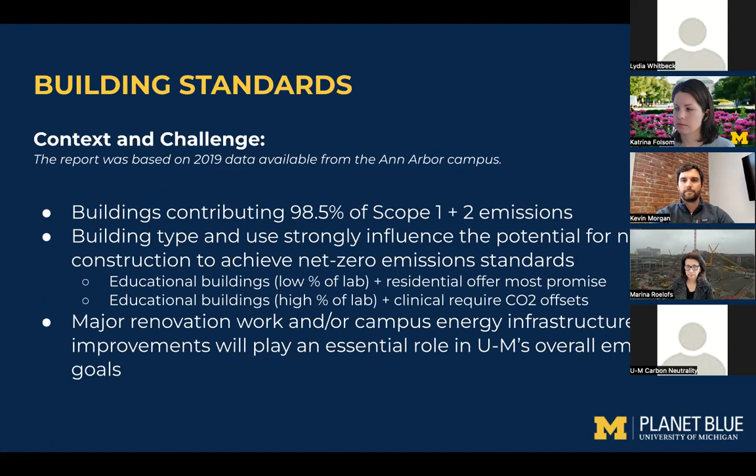This context was also within existing performance standards. U of M was already performing better than state standards require, with a 30% stretch beyond the ASHRAE 90.1 2013, which is the current standard adopted. And we also know that ASHRAE standards are moving towards net zero, but with a goal of getting there around 2030, also dependent on whether states adopt those goals. U of M has a desire to move there more quickly, so the building standards was looking for efforts to get there faster than code otherwise would. Next slide.

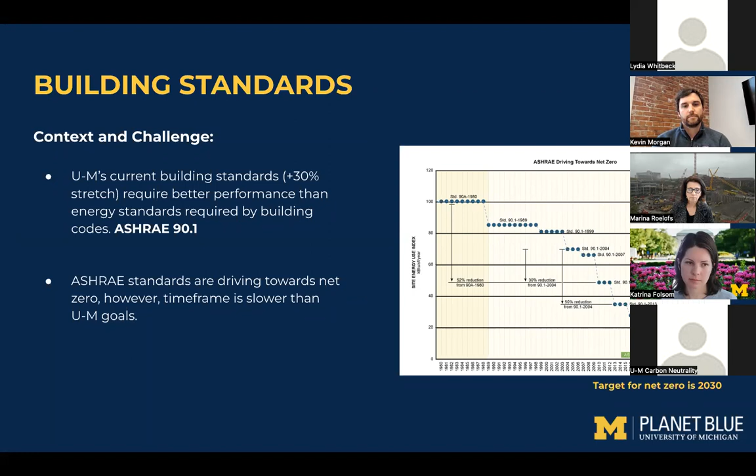At first, I was very happy to be involved in the project to try to find solutions to reduce the CO2 emission for the UM campus. I was involved in projects before with university buildings that have been net zero or even below, and I'm also currently working on projects here in Michigan to design a net zero building for my own purpose.

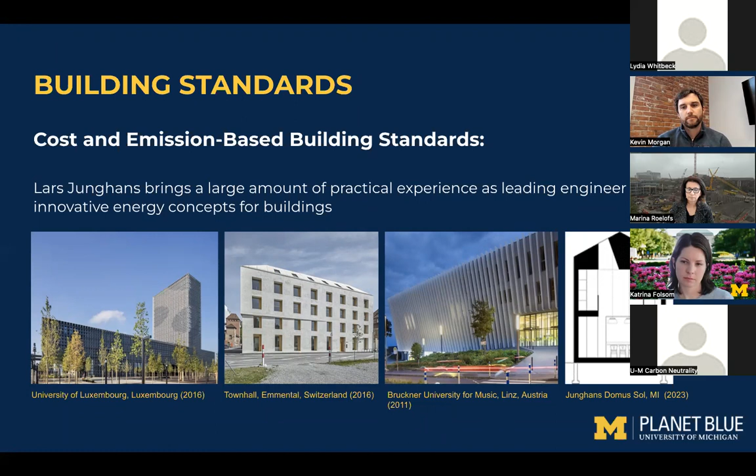What I want to present here is a little bit of the technical background which we worked on. Since I worked on these kinds of projects before I came to University of Michigan, what I've learned is that we have to look not just at the building itself, but at all of the energy flows which provide the energy for our building operation.

So to look at the CO2 emission, we have to look not just at the building itself, but how the energy is produced or generated - this means how the electricity is generated. This is very important to make an evaluation of the CO2 emission of buildings for its building operation.

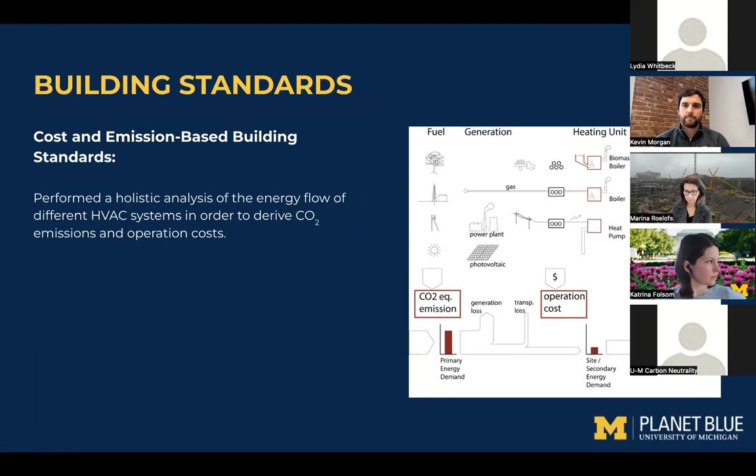So we had the approach to develop a standard which is not just based on the energy demand, but which is also based on the CO2 emission and probably also the cost - how much does it cost to have a building which produces less CO2 emission? We are not the first one doing this, but there is an international standard called the 18599 standard, which was developed in Germany and is now in the European Union a kind of general standard for buildings, which is not just based on CO2, but also integrates the cost of the building.

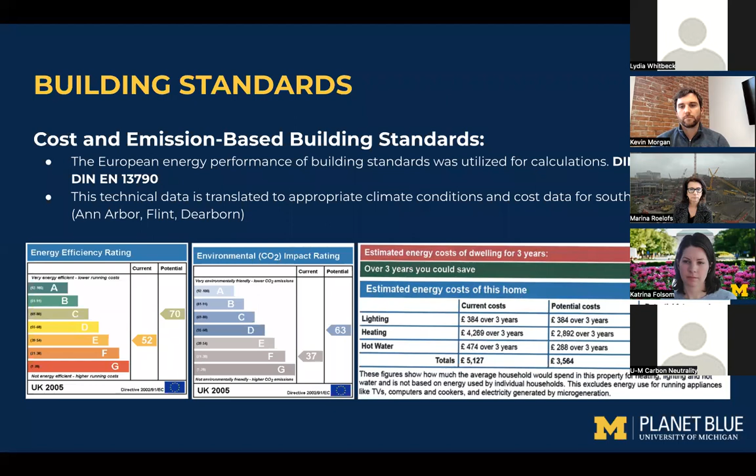Here you can see an example building from the United Kingdom using this kind of standard. You know these kinds of evaluations, like when you're going to buy a fridge - A means it has a relatively low CO2 emission, and so on. According to this, we also developed a kind of CO2 emission standard for buildings for the UM campus.

All the technical calculation is based on a small set of international building standards focused on calculating CO2 emission and operation cost. This is very intensive work, specialized for all types of buildings - residential buildings, office buildings, university buildings, hospitals, everything. It also includes not just heating and cooling, but also the energy needed for duct design, lighting, and water heating. So it's a very comprehensive international building code which we have used.

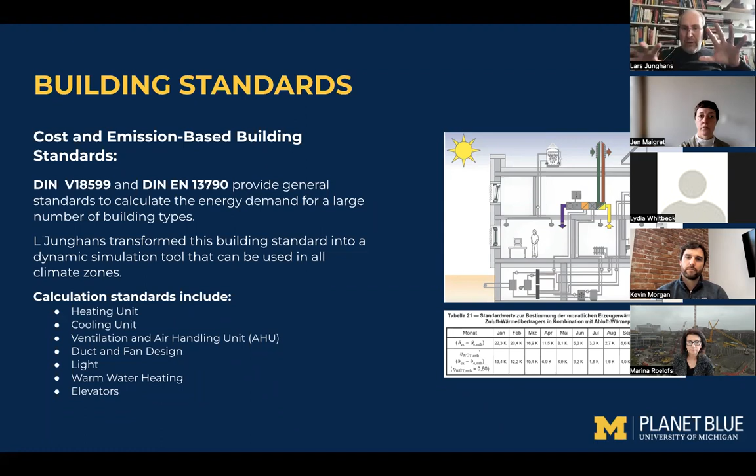While the building code was focused on European climates, what we did in our work was transform this standard to our local conditions - with more dehumidification, for example - to fit our local conditions here in Ann Arbor.

We did a lot of building simulations. We used this building code along with dynamic simulation tools, and then we tried to find the optimal situation - not just to reduce the CO2 emission, but also to find a cost-effective solution.

In this diagram, this example, you can see there are different points for CO2 emission reduction and for operation cost reduction. The optimal point is the one closest to the zero point. So we combined different options with each other, trying things like better lighting and more insulation, to find the best solution at the best optimal cost.

So we did a lot of building simulations to find an optimal spot, and then we made recommendations for different building types.

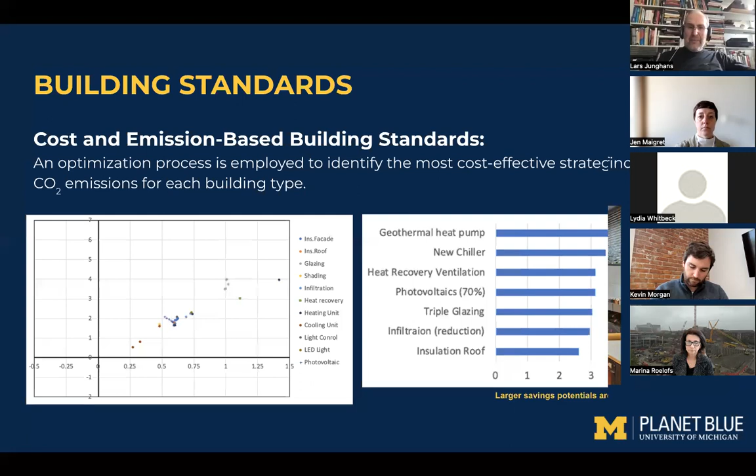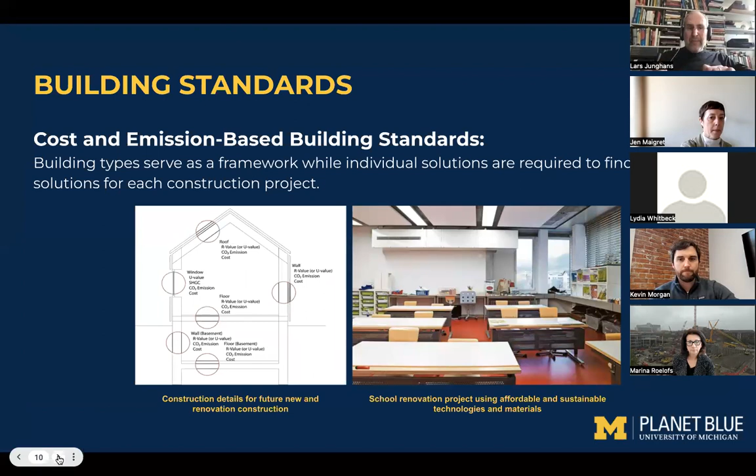We made some recommendations for different building types. This is also part of my research work, looking to find optimal solutions for building renovation in the residential area - again looking not just at CO2 emission but also at cost, always trying to find an optimal solution for both aspects, cost and CO2 emission.

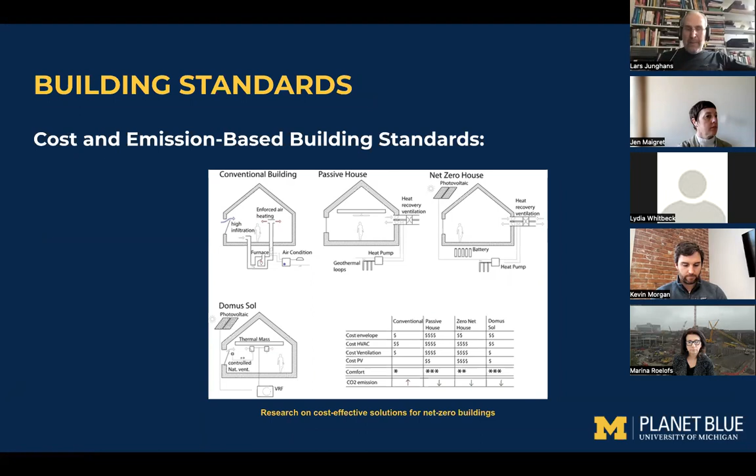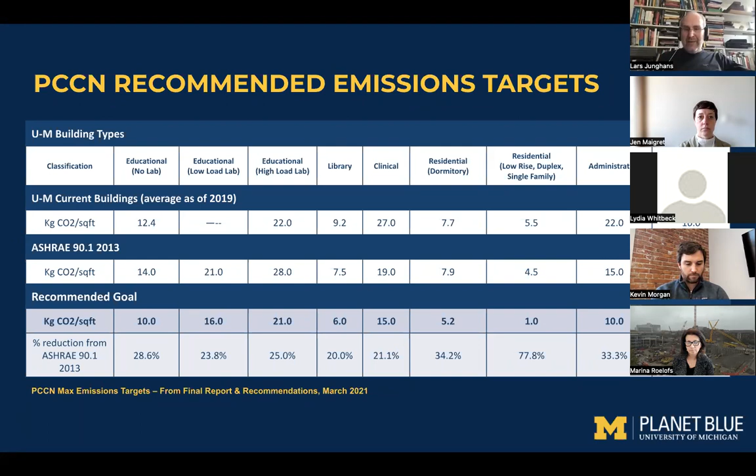Finally, we made a recommendation for a specific CO2 emission per square foot of building area, finding the value we considered most appropriate - not the smallest CO2 emission achievable, but the most cost-effective one. We made a classification for different building types to find optimal solutions, and then created a guideline for how to achieve this relatively low CO2 emission per square foot of building area.

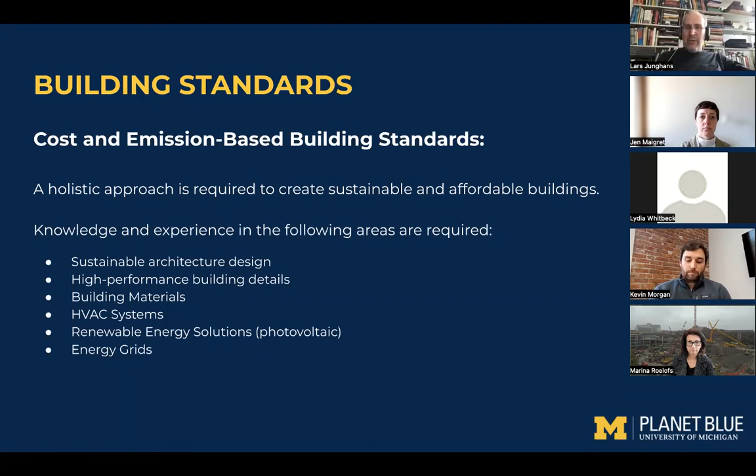And these are a little bit of recommendations which we are going to give. It's very important that we see the approach as a general holistic approach, not just to think about the building envelope or the HVAC systems. So we need to see all these different aspects: building physics, building materials, HVAC systems, and even go to the energy producer and renewable energy sources on the building site. So it's best to find a holistic solution for these problems which we are going to target. Thank you very much.

Thank you, Lars. That was a great introduction.

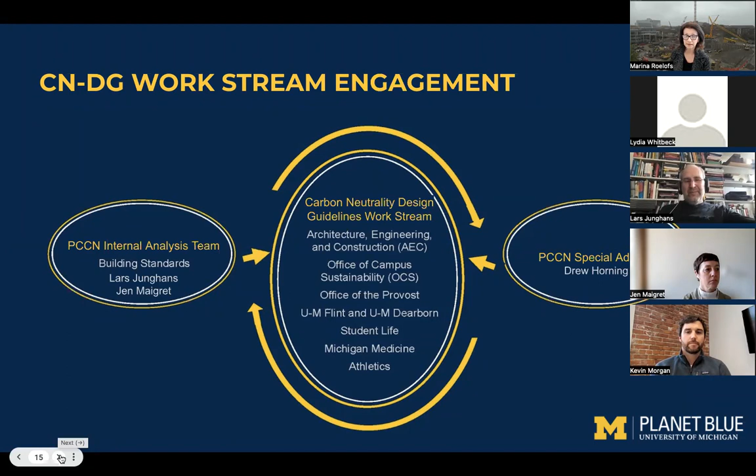So after the president announced the plans to begin implementing many of the recommendations, work streams and teams were created for the different PCCN recommendations, and ours was charged with incorporating the maximum greenhouse gas emission targets for the buildings. Our workstream membership consists of technical folks from our department, AEC, the Office of Campus Sustainability, the Provost Office, Student Life, Michigan Medicine, Athletics, and U of M Flint and Dearborn, in addition to input from the PCCN special advisors and the PCCN analysis teams as shown on this slide.

So as Jen and Lars covered, the PCCN building team created these maximum emission targets for these building types. The targets are represented in two ways: a total number, and also a reduction to the ASHRAE baseline, as indicated in the chart here.

As the workstream started looking at these, we determined that to incorporate them into our building standards, it would be beneficial for us to add more definitions to assist our project teams in determining which building categories an individual project would fit into, because most of our buildings have several space types within the same building.

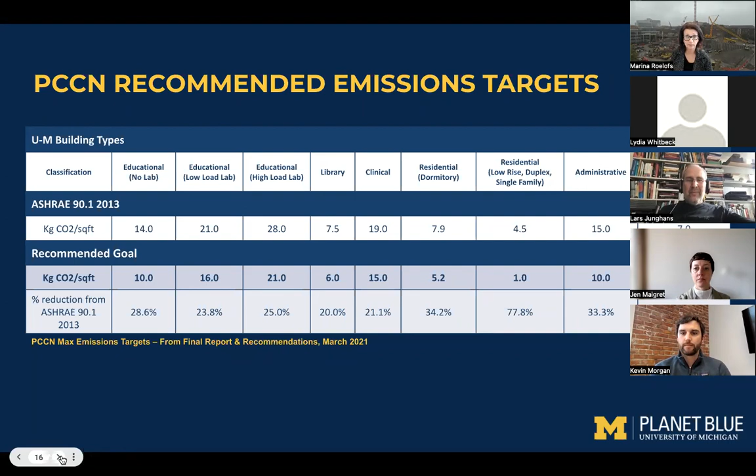Just as an example, if we look at the Biological Science Building completed a couple of years ago, it has a few different building types in one building.

Therefore, our efforts to date have been to look at the building types and add space types and infrastructure needed for the activities within the buildings. And as we worked on these added definitions, we also looked at whether there were building types that needed expansion or refinement. We have done this in collaboration with faculty experts, university units, and our technical staff, and we are now working on a new design standard to add these maximum emission targets into all of our designs.

This slide represents an example of the additional definitions to the building types that I've been working on.

This is for the educational, no lab, low load lab, and high load lab buildings, which were at the beginning of the chart that Lars and I just showed in the previous charts. What's in red is what we are adding, in summary fashion. To assist in understanding the buildings, we added three categories for each building type: the definition, the space type, and the infrastructure. In the infrastructure example, you can see that within these educational buildings, the major difference is in the HVAC, ventilation and exhaust, and the plug and process load that drive the greenhouse gas. This information will assist our teams in creating the most stringent greenhouse gas target, versus trying to fit a building into one category just based on the largest space use.

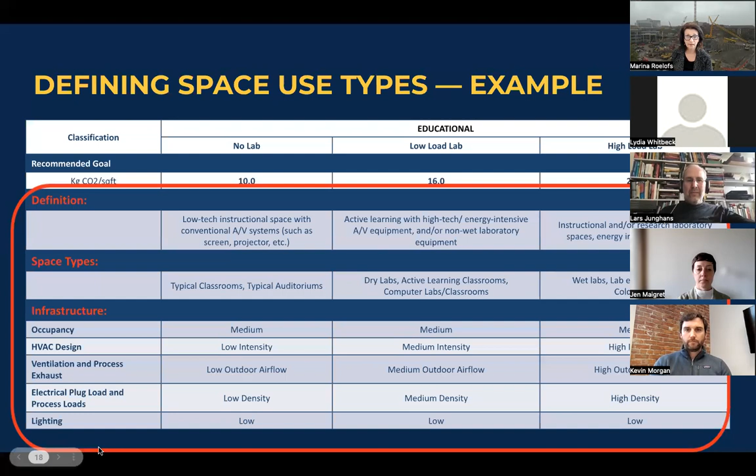Then we also looked at how to address building types that are not covered, like dining halls, storage buildings, etc. For these, we also think that the space use, infrastructure needs, and the percent reduction to the ASHRAE baseline will help us arrive at a target for those types of buildings also.

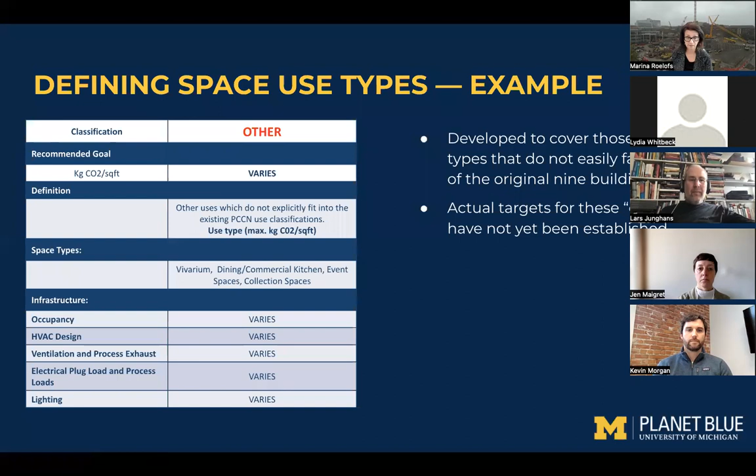So our next steps are to finalize these definitions and the new building standards for incorporating the targets into our designs. Then we would submit our recommendations to university leadership, expand the work to renovations, and continue working on improving the reduction measures on our projects. As a note, we are utilizing these targets currently in our current designs as we work toward incorporating them into our standard. So now I'll turn it over to Kevin Morgan to cover the efforts in energy management.

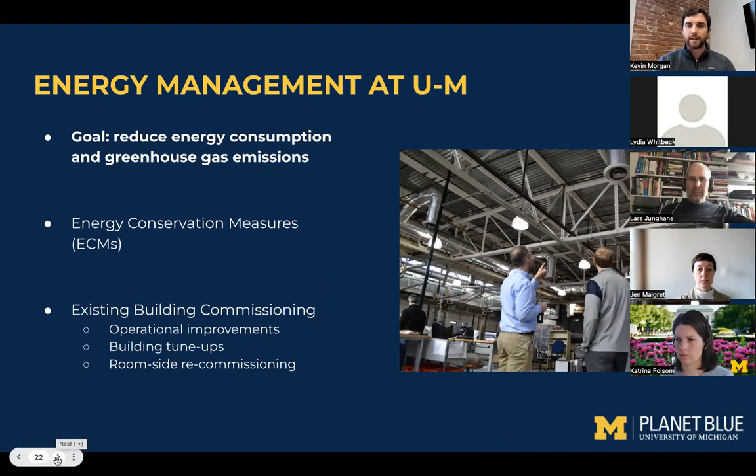This work couldn't be done without our partners across campus, including architecture, engineering, and construction, Marina's group, maintenance services, utilities, and various roles throughout the schools and colleges. We work with these folks on a daily basis. This is where some of the ideas come from, and this is how we make our ideas come to life in the buildings.

The work in energy management began back in the early 1990s, almost 30 years ago, with the first energy engineering positions that were created. So there's been a long tradition that there's value in investing time and resources in this work to save energy and reduce our carbon footprint on campus. Historically, our focus has been on general fund buildings.

This is kind of the funding path for our team. The general fund includes all of our instructional facilities, classroom buildings, administrative offices, a lot of our research space, and performance venues.

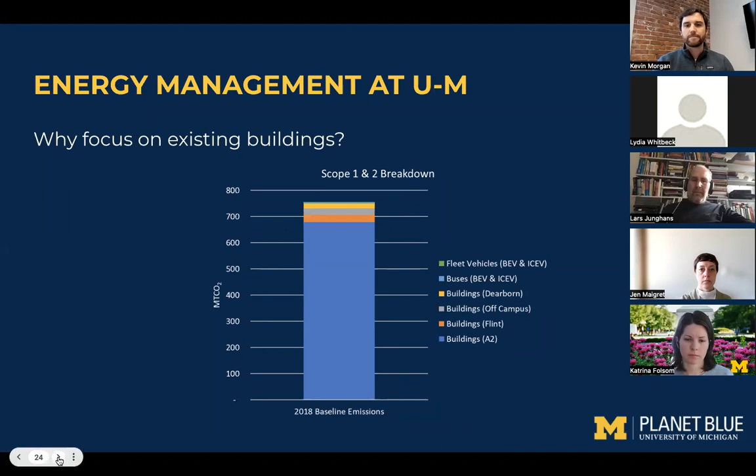So into the future, what's new? What's going to happen? This work that we're doing here on campus is going to expand out beyond the general fund and into the auxiliary units, including student life, Michigan Medicine, and athletics on the Ann Arbor campus, as well as the Dearborn and Flint campuses.

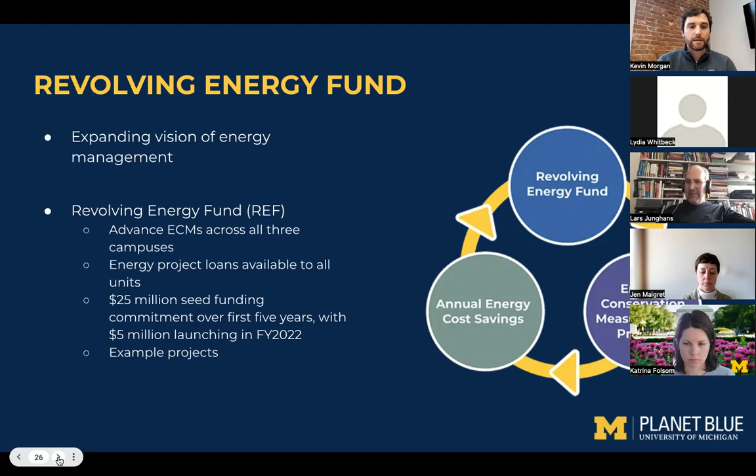To start, there's been a commitment for $25 million of seed funding over the first 5 years, with $5 million of projects launching this fiscal year. The projects included in this work are many of our traditional ECMs that I mentioned earlier, and we're in the midst of designing exactly how this process will work. But in basic terms, these are capital investments that will result in carbon savings in our campus buildings. And with that, I will hand it back to Katrina.